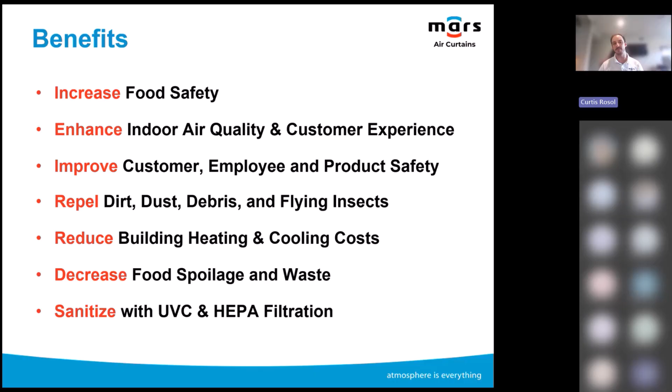Repelling dirt, dust, debris, and flying insects, reducing building heating and cooling costs, again maintaining building temperatures there, and then decreasing food spoilage and waste. The more that we can maintain temperatures, the less food potential spoilage that can occur. And then lastly, sanitize with UVC and HEPA filtration. I'll talk a little bit more about those benefits in a few slides here.

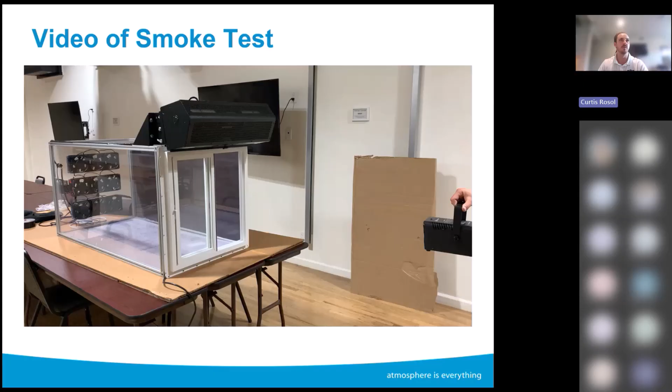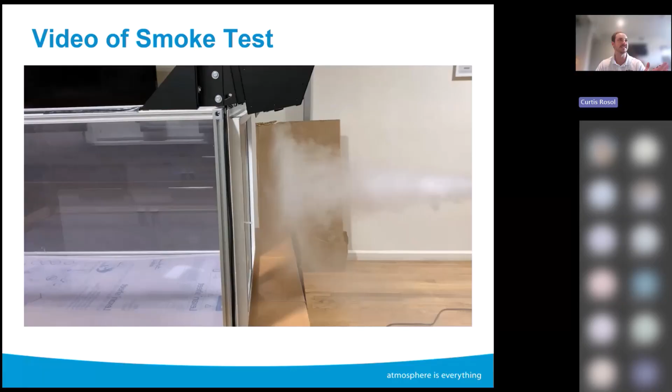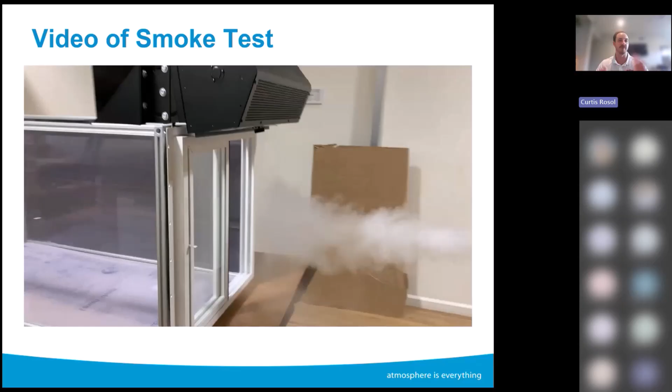So quick again, just a reinforcement - I've got a couple videos here of really just how air curtains work. I know we're just blowing air, so a lot of times it's hard to see the benefits. I think this is one good example - this is our smoke test here. As you can see, it's simulating a drive-through door, and we claim air curtains are about 80% effective. As you can see, it's doing a pretty good job preventing that smoke, which is supposed to represent pathogens or dirt, dust, debris from getting in through that window.

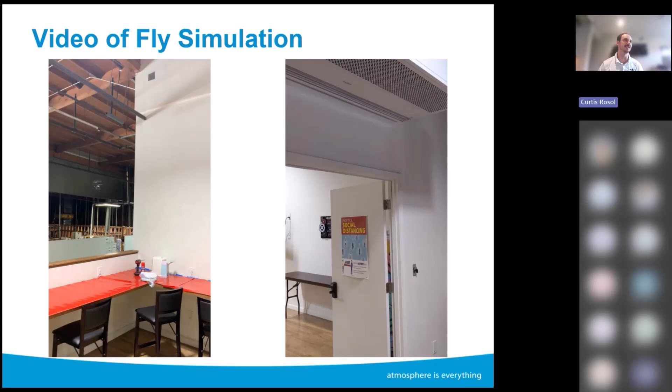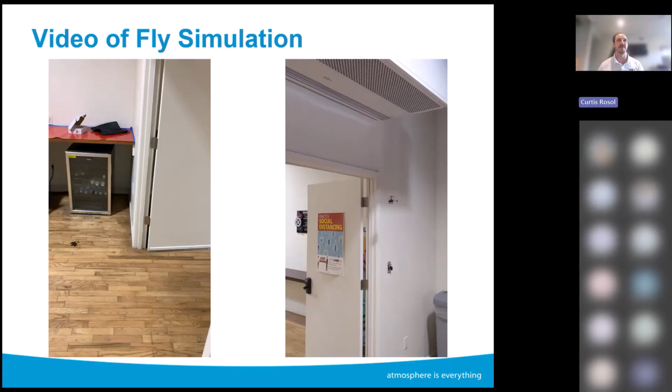Similarly, this is a video of a fly simulation. We're actually using a toy helicopter, which I would like to think is actually quite a bit bigger than your general fly application. As you can see, the air curtain's knocking it down pretty well on the left, and on the right there, just another angle of the same application. Again, just visual representations of an application that's somewhat hard to see - that's kind of why I like to show those in the PowerPoint.

Okay, let's jump into some installation locations. So again, focusing on convenience stores. Really quickly, I'm going to go through these one at a time. But I like to just show this.

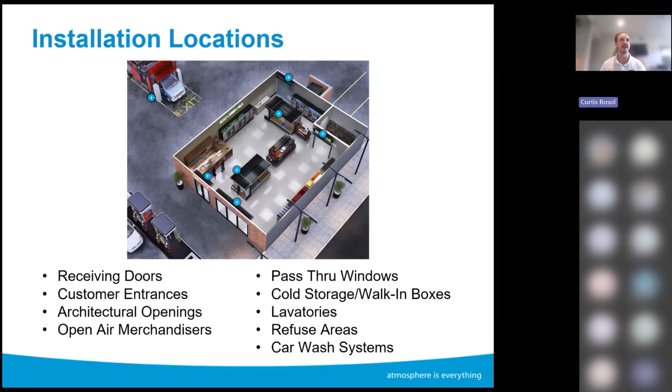This is actually a rendering of a convenience store. Now, this is available on our website. If you go to the Learning Center tab, there's an industries section under that Learning Center. We have a grocery and convenience store page, and it's an interactive rendering, so you can click on the plus signs that you see there, and each plus sign will bring up the application in the C-store, and then really what benefits the air curtains can provide in those applications. So really cool tool there. I would recommend maybe after the PowerPoint, you guys check that out - a really cool interactive way to get a better idea of what models to use and where, within C-stores. So again, kind of walking through them one at a time here.

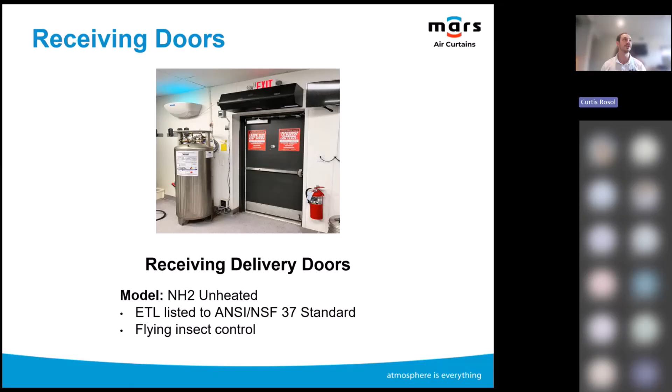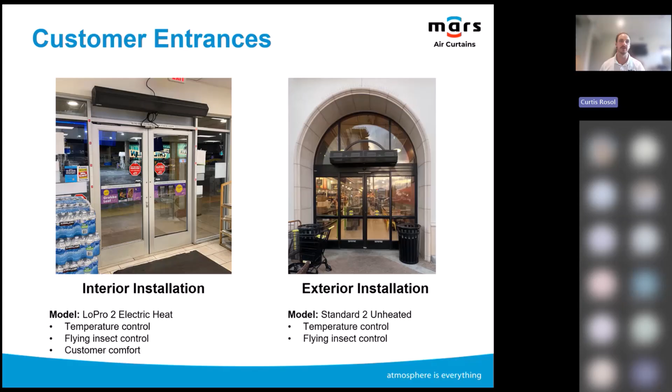Quick note with exterior installations: first and foremost, we always recommend you install the air curtains on the inside of the building if possible. But for whatever reason, if you can't, as long as the unit's an unheated unit - so no heat element to it - and it's covered by some sort of awning or something like that, not exposed to the elements, you can do an exterior installation. We do have weatherproof covers available as well if you needed to buy one separately, if you wanted to do an exterior installation but didn't have that awning available at the job site.

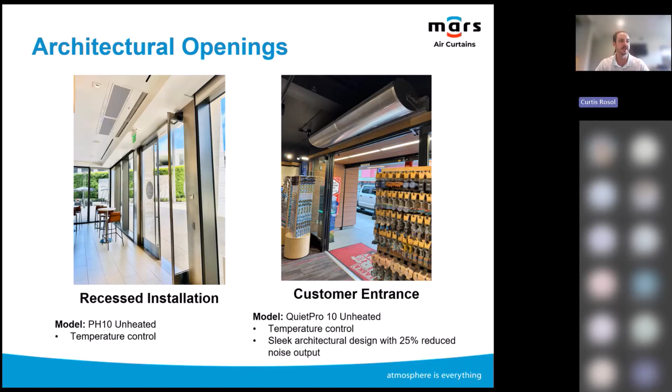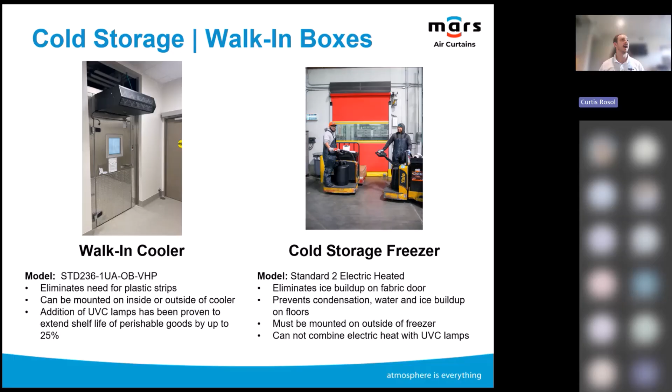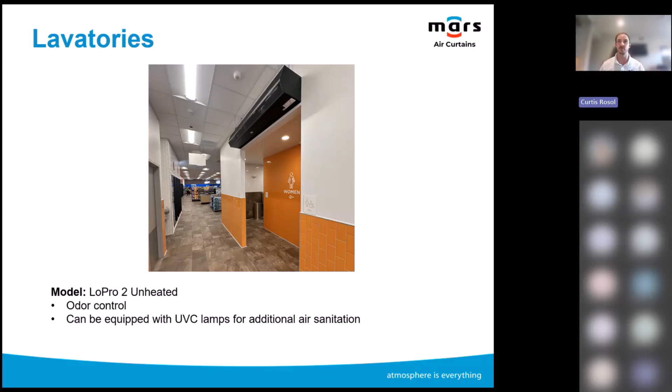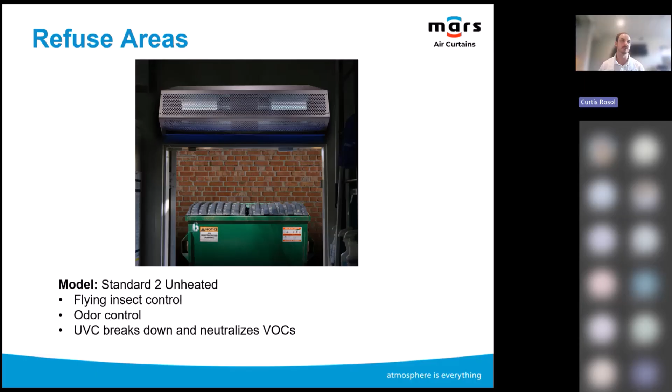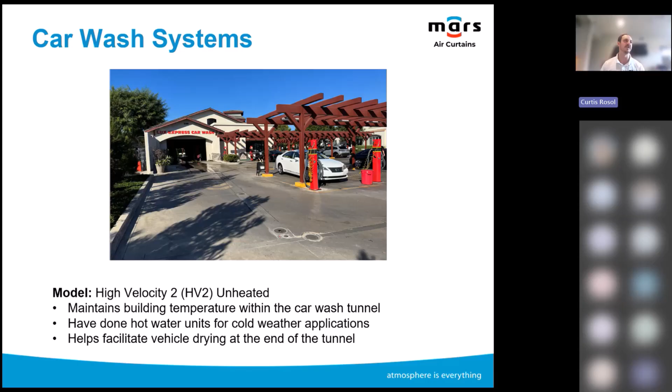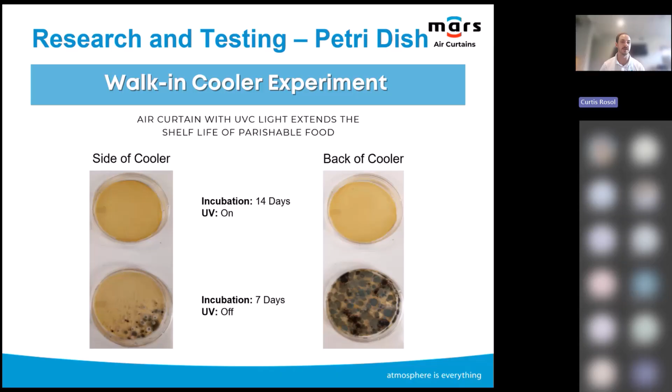Pretty interesting, but we repeated the experiment with the UV function on. Put in a fresh set of Petri dishes and left them in there for 2 weeks, and saw virtually no growth while that UV air curtain was running. That led to a second study, kind of similar.

Because no one's selling Petri dishes, I don't think, we wanted to use something a little more applicable. We did strawberries. We actually recreated this test at our factory, and again got very similar results using the strawberries.

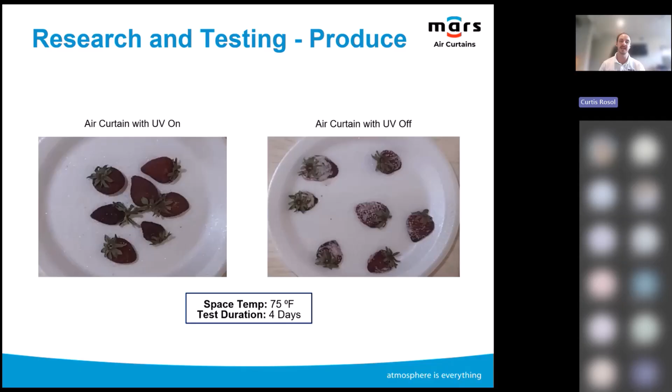We're actually conducting a third test with the UV units, again just to get as much empirical, realistic, lifelike data as possible. A couple optional features we can provide.

We have more than this, but these are some of the main ones. 304 stainless steel, we get that request a lot if you're in a corrosive environment or something like that. We do have heat options available: electric, steam, hot water, gas, which helps prevent that wind chill effect.

Washdown construction, whether you're in a factory or maybe a food processing plant, we can do washdown units. Tamper-proof, that's typically more for high schools or prisons, where you don't want anybody else tampering with the unit. We can do that.

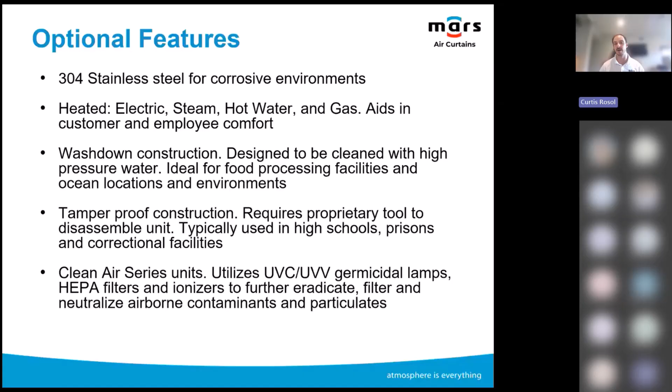And then lastly, clean air series, which I talked about with our UV unit, but we do have HEPA filters available, and we also do bipolar ionization as well, if that's what's needed.

Lastly, just some tools available for you. We do have a product selector program on our website, really easy to get to from our homepage. Highly recommend you check that out if you're looking for a starting point about what air curtain you need. I think that's the number one starting point for you there.

ROI calculator, for those interested in return on investment, energy savings, how fast can I get my money back, things like that. Our ROI calculator tool, we just relaunched it. It works really well, so I'd recommend checking that out.

If you need specifications, you can pull that from AutoQuotes, Master Spec, or Spec Link, and you can reach out to our internal team if you need those jobs specifically tailored. For drawings, we have CAD blocks in KCL available, we're on BIM objects, and we do have Revit files. For quoting, AutoQuotes and Specify are available.